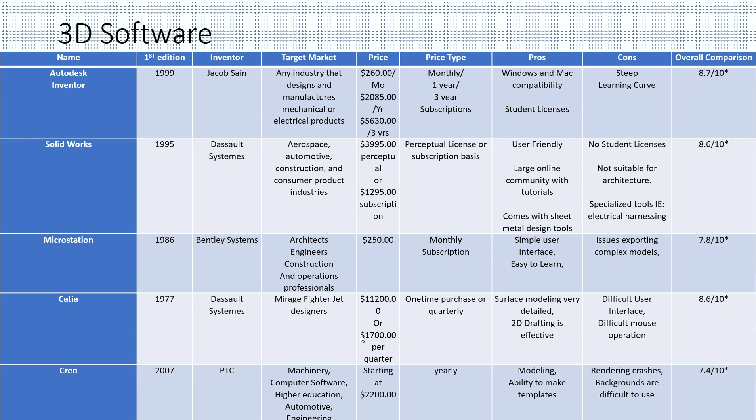Hand in hand with computer design goes CNC, computer numerical control. It's the automated operation of a machine by a computer program, invented by John T. Parsons back in the 40s. Then, though, it was only NC, numerical control, and everything was mechanical. Milling machines, lathes, routers, welders, grinders, laser water jet cutters—all of these are CNC compatible and are industry-leading technology for manufacturing.

CNC is also capable of two-dimensional flat projects, such as cutting a design out of a sheet of steel, 2.5 dimensions, which is actual CNC carving, and 3D, which is the full sculpting of an object.

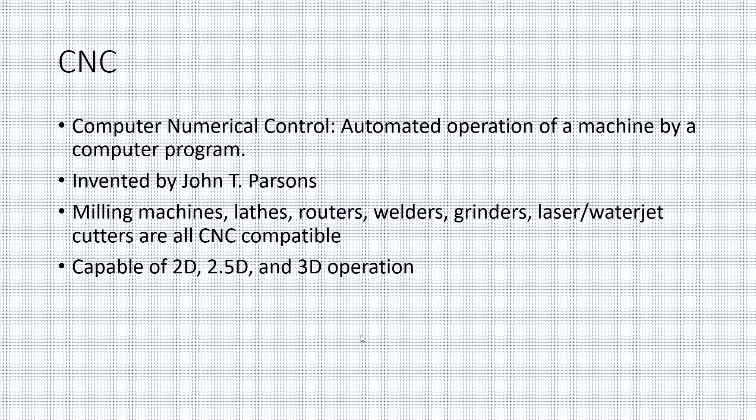Because of the versatility of 3D design in CAD, there are a plethora of industries we can go into—everything from video game design, considerably more advanced than Battlezone, to architecture, one of the mainstays of CAD, into digital animation, film, and of course manufacturing and production. According to Indeed, the average salary for a 3D designer in the US is right around $4,000 a month.

So I had a problem. My wife knits, and I have a house full of yarn and a house full of gadgets that are supposed to help her knit. The problem is none of them do a great job, and none of them are really convenient. So I decided to remedy this, and I wanted to design one tool that could replace them all.

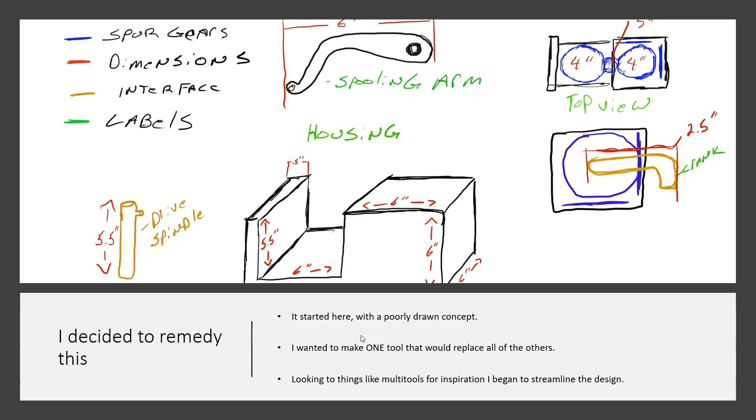As you can see, I am by no stretch of the imagination a conventional artist. I can't even draw a straight line. But going through several designs and using the principles I learned in this course, I was able to design this. We'll go to a wireframe so you can see the internal workings.

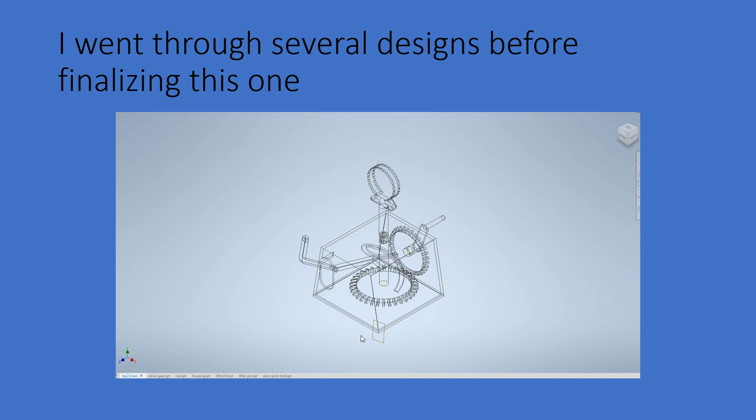The drive gear, which is turned by the hand crank, interacts with that bottom drive and spindle, which rotates the tool head at the top and also rotates the coil in the middle, which actuates the lifter arm and ensures everything is spooling correctly. They utilize a quarter-inch drive, just like a socket wrench, to connect to the drive gears.

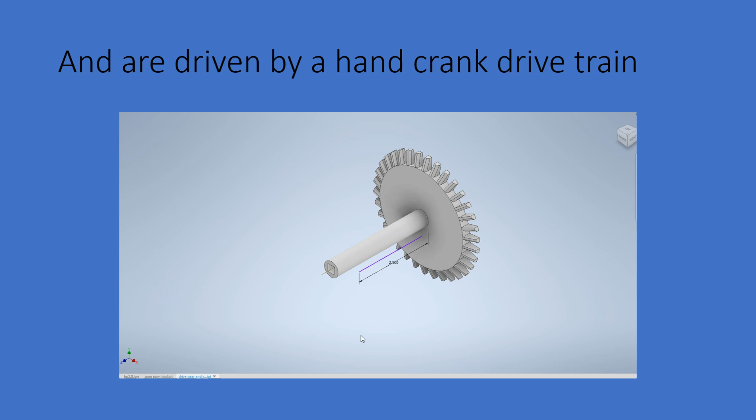This will allow me to design specific tools to meet whatever needs my wife has. Here's a close-up of that drive shank that the tools interact with, and that is the coil that actuates the lifter. The lifter, as you can see, has multiple angles on it to ensure it's going up and down at just the right angle to make the spooling work. I got these angles off of several of the gadgets my wife has around the house.

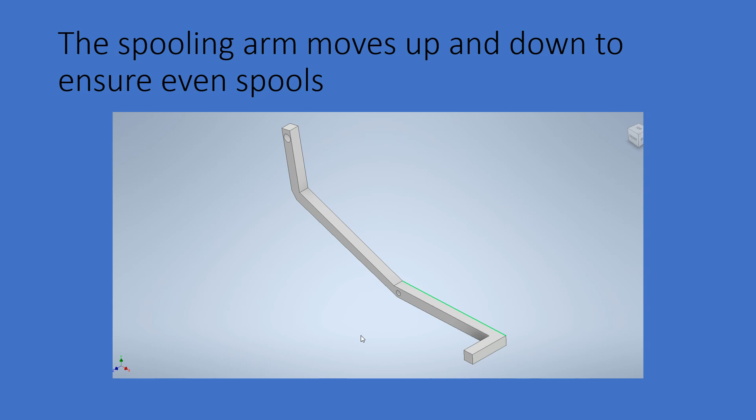So I learned that CAD and digital design go a lot farther than I thought they did. I had really thought that they were simply architectural and manufacturing tools. In actuality, 3D design and CAD have their hands in just about every manufacturing industry you can think of.

I will be able to put these skills and build on them to design products, inventions, and ideas as a means to provide for my family. But additionally, and perhaps more importantly, my long term goal is to start a nonprofit organization that would provide training, software, and printers to occupational therapy centers free of charge, allowing them to create items tailor fit to the children they serve without having to rely on a print on demand facility or wait for a backlog. Thank you.